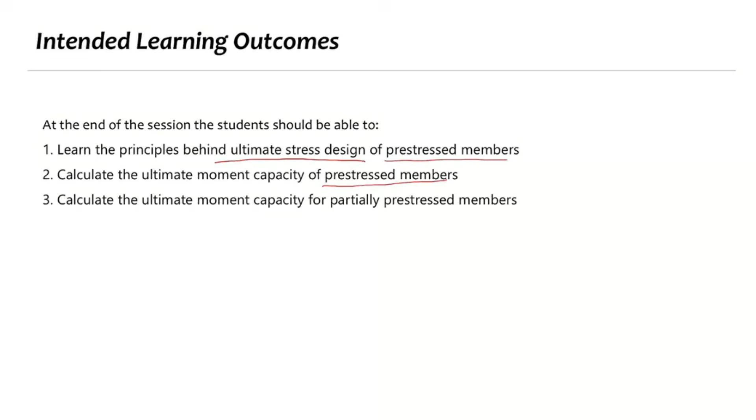For this one, what we are going to refer to is NSCP 2015. Again, we are going to refer to NSCP 2015 for calculation of pre-stress members for this discussion specifically.

There are different formulas when it comes to different codes, but of course we are going to refer to the local code. There's also a small difference when it comes to DPWH guidelines, but it's actually very small. So the concept is actually the same. It's the same.

Number three, we're also going to calculate the ultimate moment capacity for partially pre-stressed members. When we say partially pre-stressed members, it means it's actually a combination of rebars plus tendons. So we are going to combine rebars and tendons. That is called partially pre-stressed members.

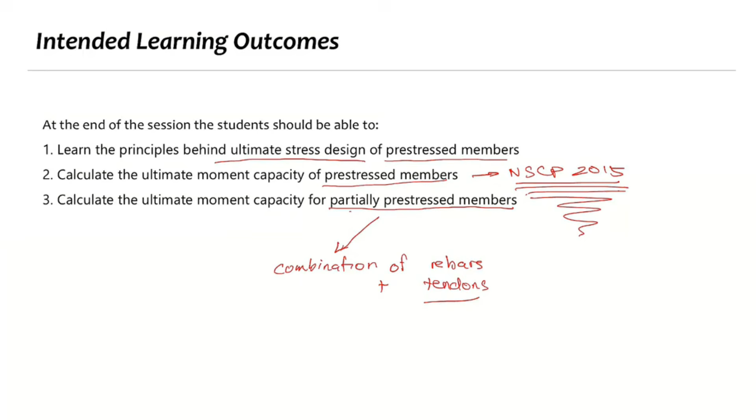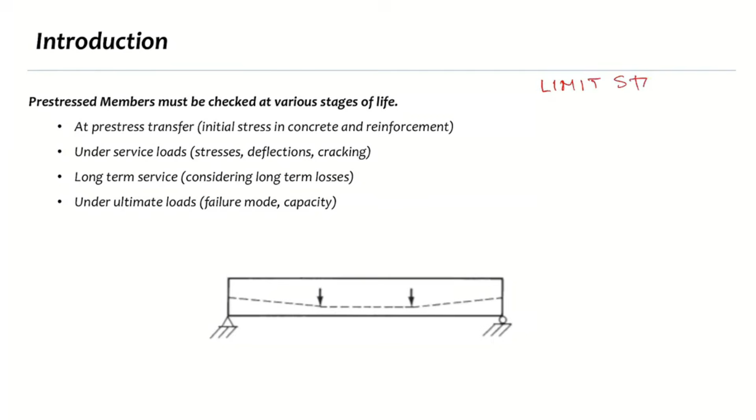Just a recall: what we are designing for are different limit states. The principle that we are using in designing is what we call limit state design. When we talk about limit state, I already discussed this in advanced concrete. When we say limit state, we are designing for all types of failure.

So in this case, we already know how to design with serviceability. Under serviceability, when we are designing for serviceability, that includes stress calculation and deflection. However, when it comes to deflection, I won't be able to cover it in this course because it's quite long, and basically how you calculate the deflection is already covered in theory of structures.

But when it comes to pre-stress, you calculate the deflection in order to calculate the cambering, because we are the ones who determine how big the curve of our pre-stress member should be. That's called the upward deflection, or camber. So how big does the camber need to be to counteract the deflection due to dead load? Again, the camber is actually the upward deflection due to pre-stressing, in order to counteract the deflection due to dead load. We calculate that too, and that is under the serviceability requirement.

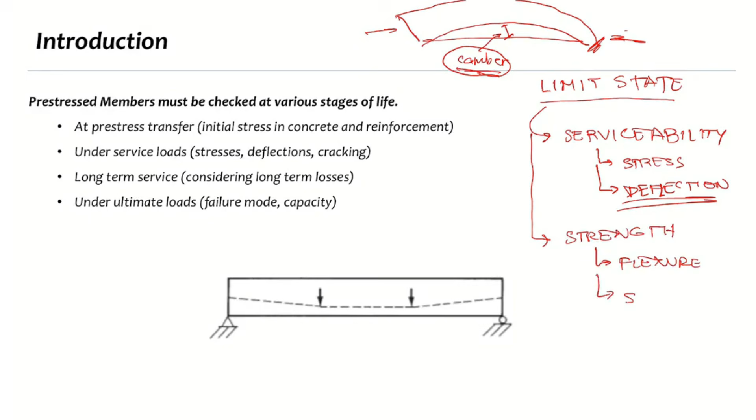Another limit state is the strength limit state. For the strength limit state, of course, that's where our flexure and shear come in. Of course, when we calculate for flexure, we are going to consider the ultimate strength design principle or collapse principle. Again, when we talk about flexure and shear, we are going to consider the collapse stage.

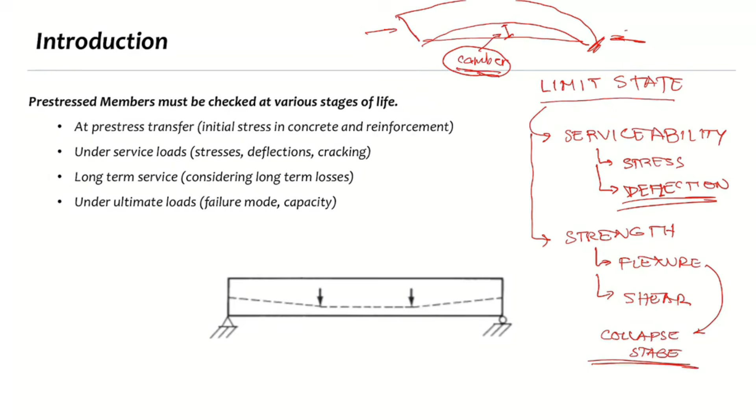So, when we are talking about flexure, we are going to consider the collapse stage, or basically the principle of ultimate strength design. For the collapse stage, that stress condition is considering an impending collapse — close to failure — in order to consider the full stress or full strength of the material.

And in order to ensure that our design is actually safe, we are introducing load factors. So in this case, when we are considering ultimate strength design, we should consider load factors. It's not 1.2, 1.6 for bridges — for bridges, it will be 1.25.

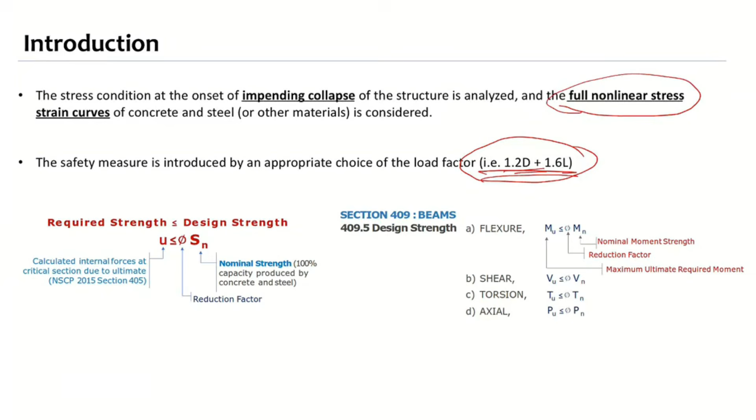For bridge, it will be 1.25 of DC plus 1.5 of DW plus 1.75 of live load. So 1.25, 1.5, 1.75 when it comes to bridge. But the principle is the same: the required strength, or the applied load, or what we call the demand, should be less than the capacity. The capacity is phi SN.

Or basically your capacity. When we calculate for the capacity, we also apply the reduction factor. The reduction factor accounts for any uncertainties in the calculation of the capacity. So when we say uncertainties, that is the strength of concrete, the strength of steel, the strength of tendons. So phi MN, the demand should always be less than the capacity.

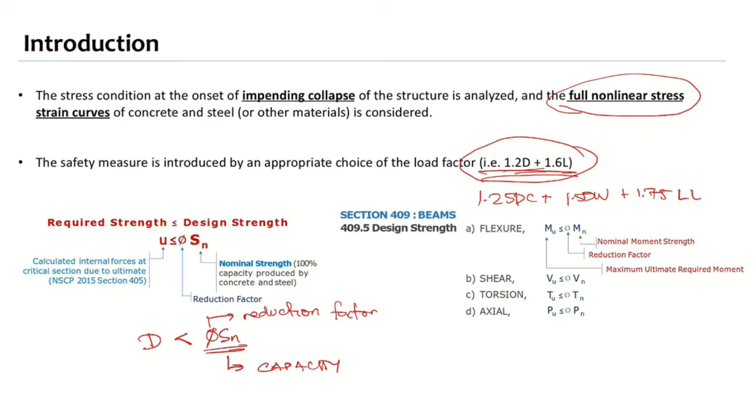Okay. So when we consider the ultimate strength design in prestressed beams, it's actually very similar to the principle of ultimate strength design in reinforced concrete beam. Parehas lang din 'yan, no?

So we will have a stress block. Meron tayong stress block A, with a maximum stress of 0.85 FC prime. This comes from the average of the strength, the average of the stress of the ultimate strength of the full nonlinear stress of the concrete. Kapag kinuha natin yung nonlinear stress ng concrete, naka-curve siya like this. So instead na consider natin yung curve, what we did is we consider an average stress block. So yung average stress block niya, yan po yung 0.85 FC prime.

So if we get the force caused by the stress, or the volume of the stress block, yan po yung compression which is equal to 0.85 FC prime AB. So basically to have the compression block, it's just 0.85 FC prime times the area of the stress block. Ang area ng stress block kapag rectangular is A times B.

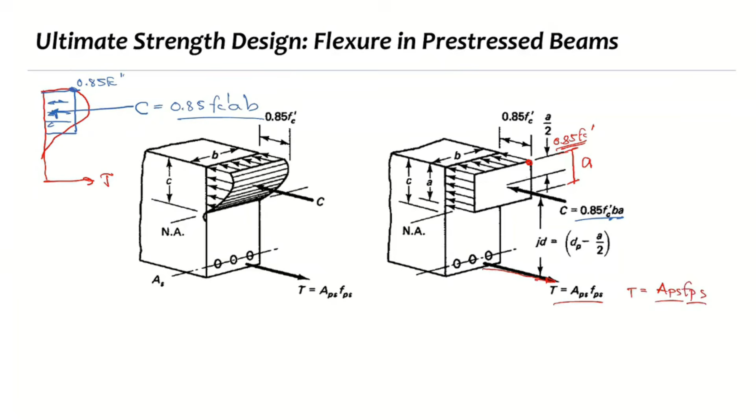On the other hand, yung ating prestress naman, yung ating tendons, the tension force caused by the tendons will be equal to APS, FPS. Hindi na siya ASFY, it's actually APS, FPS. APS is the area of the prestress strands, and FPS will be equal to the stress of the prestress strands. So yung FPS, meron yang provision.

Meron siyang provision sa mga codes kung on how to calculate the FPS. It differs from different codes, but the principle is still the same. Nagkakaiba lang ng formula yung nakapublish sa different codes pero parehas pa rin naman yung principle. So that's FPS to calculate the stress. Later on, I will show you on how to calculate it. This is the formula that we have in NSCP 2015, or basically, that is the stress in the prestress reinforcement.

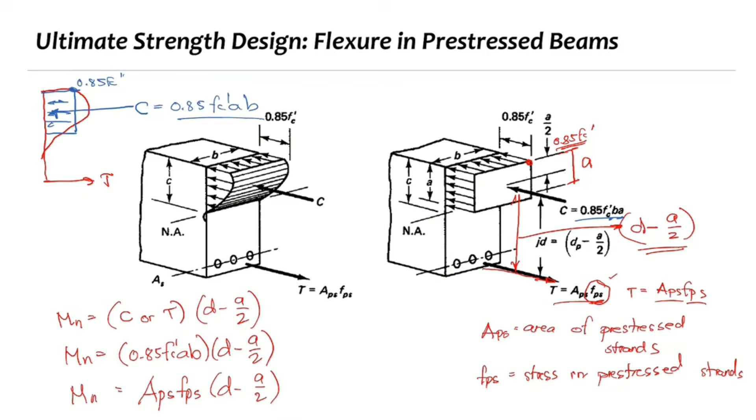You could question, sir, kailangan pa ba nating i-check kung mag-yield yung bakal? Hindi na po, because we are using FPS, hindi mo na kailangan i-check. Okay, you don't have to check, because meron tayong formula para dito sa FPS.

Okay, so when it comes to ultimate strength design, we also have to consider the depth of the neutral axis. The neutral axis is actually the division of the compression and tension zone. Ang depth po ng neutral axis natin, that is actually the depth C. And the relationship between the stress block A and the depth C is actually this equation.

A is equal to beta 1 C, where beta 1 is given in NSCP, which is if your FC prime is between 17 and 28 megapascal, beta 1 is 0.85. Or if your FC prime is between 28 and 55, then your beta 1 is equal to 0.85 minus 0.05 over 7, FC prime minus 28.

On the other hand, if your FC prime is greater than 55 megapascal, then your beta 1 is 0.65. So that's the relationship between the depth of the neutral axis and the depth of the stress block.

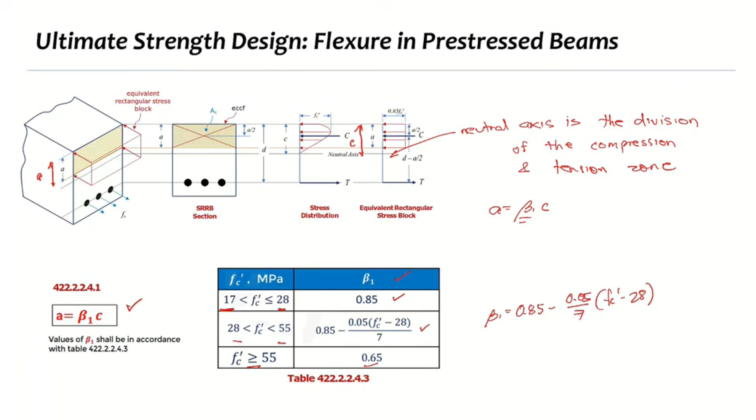Our stress block, that's the depth A. Stress block is the depth A. The depth of the neutral axis, that's depth C. So those are different, right?

So now how do we calculate FPS? According to our NSCP 2015 code, stress in bonded prestress reinforcement at nominal flexural strength. We have two types of prestressing methods: bonded and unbonded.

When we say bonded, this is where you put grout inside to hold the reinforcement. We call it bonded because it is bonded to the concrete. So in the area where the tendons are placed, you put grout inside. That's why it's called bonded tendons. So stress in bonded prestress reinforcement - we'll talk about bonded first.

For bonded reinforcement, to calculate for FPS, this formula is only applicable if your FPS is greater than 0.5 of FPU. So how do we calculate FPS, and how do we make sure it's greater than that limit?

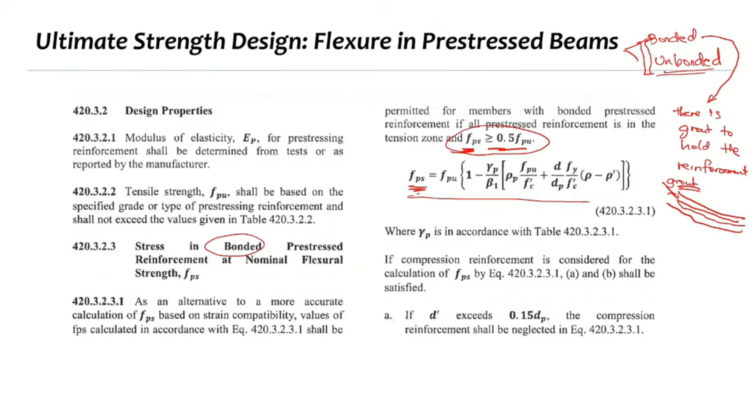To check the FPS, FPS is equal to P effective divided by APS - basically the post-tension force, or the pre-tension force, the prestress force, divided by the area of tendons.

So to get the FPS you'll use to check that FPS is greater than 0.5 of FPU - once you're sure you can use the formula, then FPS equals FPU times 1 minus gamma P. Let's go through each term.

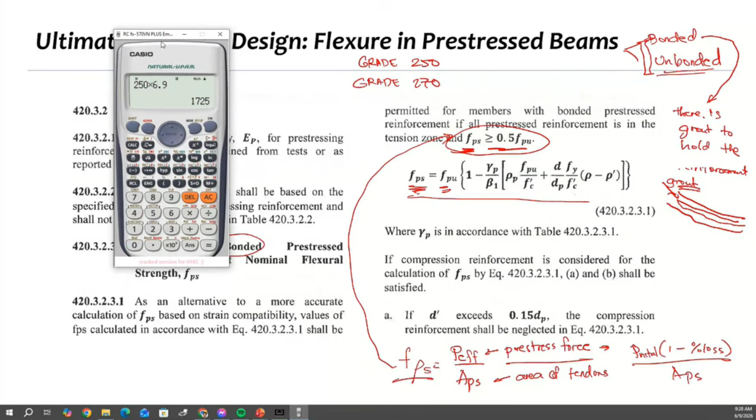250 times 6.9, that is 1725. Grade 250 is actually around 1750. Then grade 270, the FPU is equal to 1860 megapascal. Grade 250, how much did we calculate - around 1725.

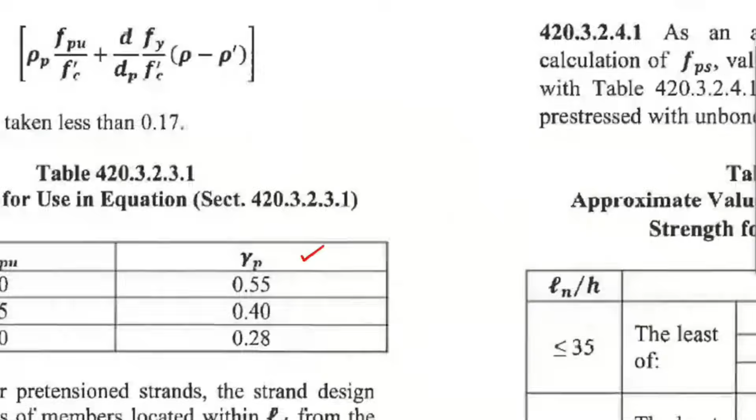So basically, FPU depends on the ultimate strength of the tendons. 1 minus gamma P - gamma P is in accordance with table 420.3.2.3.1. So gamma P depends on the ratio of FPY over FPU.

If the ratio of FPY over FPU is 0.8, this type of tendon we call deformed bars. If the ratio of FPY over FPU is 0.85, then the gamma P we use is 0.4 - that's what we call stress-relieved.

If the ratio of FPY over FPU is 0.9... that is low relaxation. So you have deformed bars, stress-relieved tendons, and low relaxation tendons. It depends on which one you use in your design.

This ratio also helps us determine the yield strength of tendons, since they have different yield strengths.

For example, for a stress-relieved grade 270 tendon, to get FPY, we know FPU is equal to 1860 megapascal. To get FPY, use the ratio of FPY over FPU, which is 0.85 for stress-relieved. So FPY is equal to 0.85 times FPU, which is 1860. How much is the FPY of grade 270?

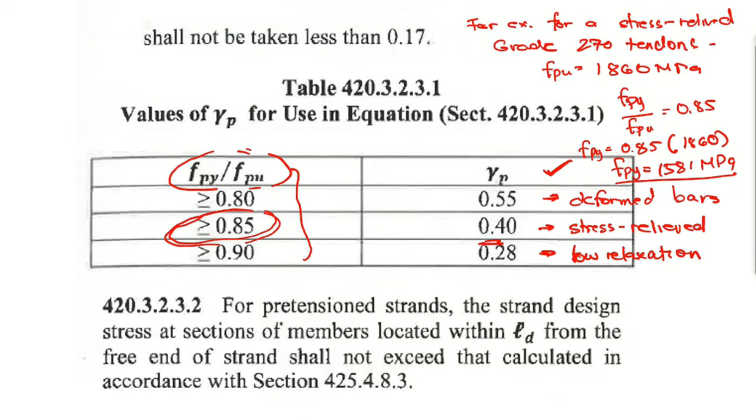For deformed bars, you use 0.8 instead. For low relaxation, you use 0.9. That's how you calculate the yield strength of tendons.

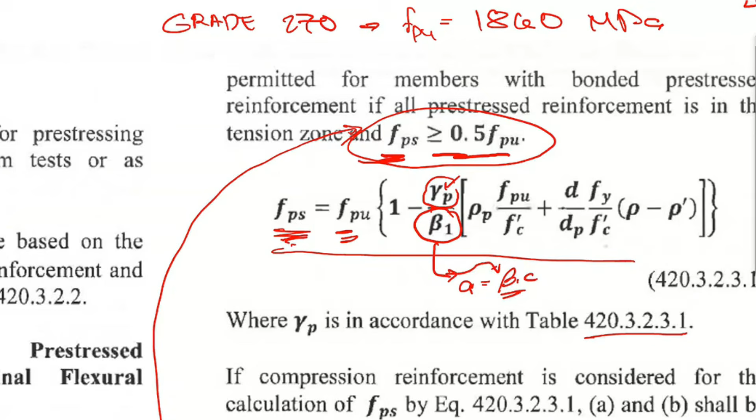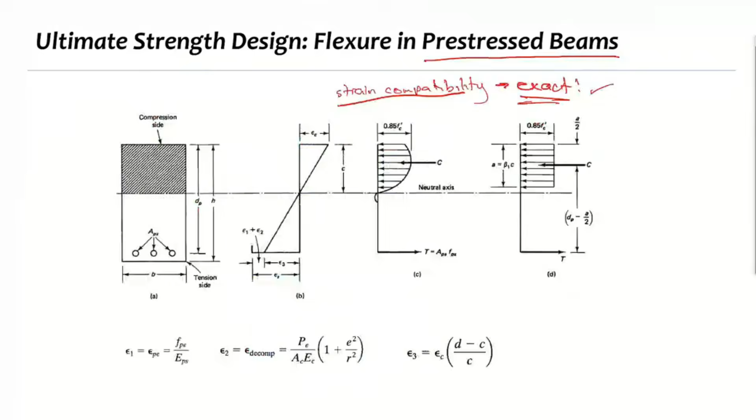Okay, so alam na natin paano kuhanin yung gamma P. On the other hand, paano naman kunin yung beta 1? Beta 1 depends on the strength of concrete. Ito po yung beta 1 na ginagamit natin sa A is equal to beta 1C. So yung beta 1 dito, parehas lang din dyan, yan lang din yung beta 1 na gagamitin natin. Beta 1 is actually this value, 0.85, 0.7, 0.65.

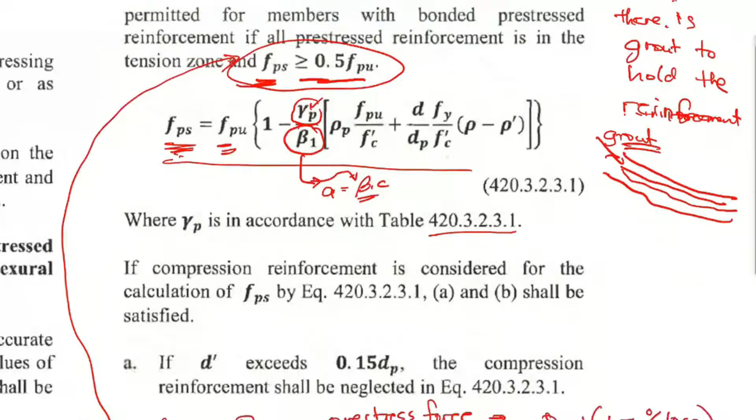Okay? And then rho P, ano naman tong rho P? Rho P is the pre-stress ratio. So paano makuha yung pre-stress ratio, yung rho P? Rho P is just equal to APS over BD, APS over the area of concrete, B times the effective depth D. APS over BD, that's rho P, pre-stress ratio. Parang reinforcement ratio lang.

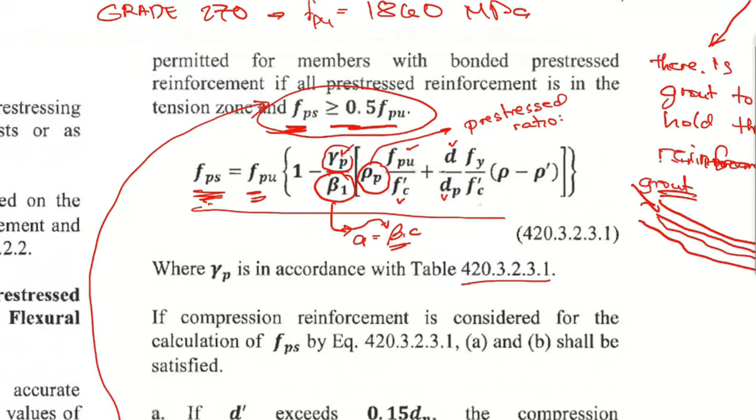FPU, that is the ultimate strength, okay na tayo dyan. FC prime, okay din naman tayo dyan. Plus D over DP, magkaiba po yung D saka DP. This is applicable, this part right here, kapag meron na tayong additional reinforcement, meron tayong additional reinforcement na rebar. So yung D natin, that's the effective depth of rebar. Yung DPS naman, that's the effective depth of tendons. So D over DPS, that's the effective depth of rebar over the effective depth of tendons.

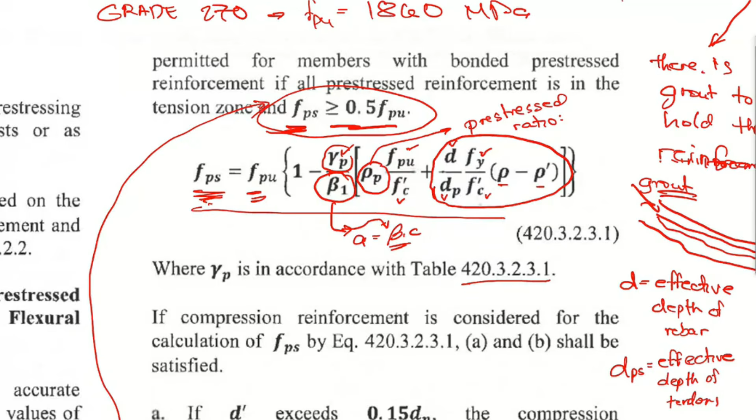Fy is the strength of rebar. FC prime is the strength of concrete. Rho minus rho prime, yung rho natin is the steel ratio at tension. Again, yung rho is AS over BD, ibig sabihin tension reinforcement po ito. Kapag naman po rho prime, that is AS prime over BD. Yung AS prime, that is the compression reinforcement. Or basically, yan yung area ng bakal sa taas under compression.

Also, let's read through. If compression reinforcement is considered for the calculation of FPS, equation A and B shall be satisfied. Dapat daw makonsider natin yung equation A and B. Equation A, if D prime exceeds 0.15 of dP, the compression reinforcement shall be neglected. Ibig sabihin, pag yung position ng D prime exceeds 0.15 of dP, or dP is the effective depth for tendons, hindi na siya dapat i-consider.

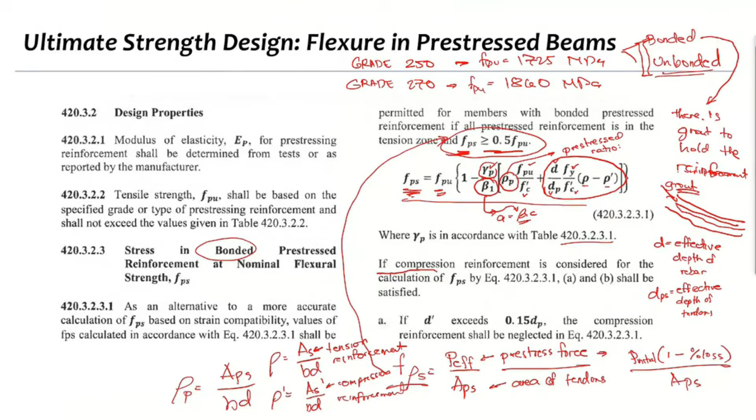Next, if compression reinforcement is included, this term right here shall not be taken as less than 0.17 if may compression reinforcement. Again, we should consider this if compression reinforcement is considered, itong A and B. Consider natin yan kapag may compression reinforcement.

Another one, for unbonded pre-stress reinforcement at nominal flexural strength. This one naman, unbonded naman tayo. But before we go to unbonded, punta muna tayo dun sa, mag-example muna tayo ng bonded tendons. Bonded muna tayo.

Also, to calculate for the phi factor, it will be the same as how we calculate the phi factor for reinforced concrete. We have compression controlled, tension controlled, and transition. For the transition, in this case, our strain, hindi na po siya EY kasi EY is the yield strain of steel. Ang gagamitin natin dito, 0.002 kapag transition. Transition, that is between 0.002 and 0.005. Kapag 0.65, 0.002. Kapag 0.9, 0.005. That is the transition zone.

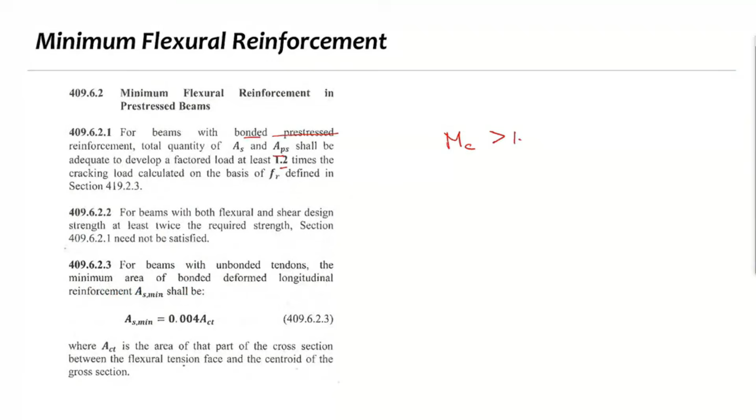Aside from that, we also have to calculate for the minimum flexural reinforcement for beams with bonded pre-stress reinforcement. So dun muna tayo sa bonded. For bonded pre-stress reinforcement, dapat daw yung quantity ng AS mo and APS shall be developed at a factored load at least 1.2 times the cracking load. So dapat yung MC natin, yung capacity natin ng moment should be greater than 1.2 MCR. Yan po yung minimum capacity niya, that's the minimum capacity of a bonded pre-stress beam. So dapat yung phi MN should be greater than 1.2 ng cracking load, MCR. So alam natin mag-calculate ng MCR, that is using the requirements of serviceability, yung P over A, MC over I.

Sige, let's have this example. For this one, this is for bonded tendons. So bonded muna tayo. So bonded tendons, we have an FC prime 34.5 megapascal. Usually yung mga pre-stress beams po natin, matataas yung FC prime niyan, hindi lang 28 na. So we have FC prime 34.5, FPU 1860. So ibig sabihin this is grade 270. EPS is 197,000 megapascal, that is the modulus of elasticity of pre-stress. Hindi siya 200,000, it's 197,000.

We have to consider 15% losses and bonded tendons. The initial pre-stressing is 780 kilonewton. Span length is 10 meter.

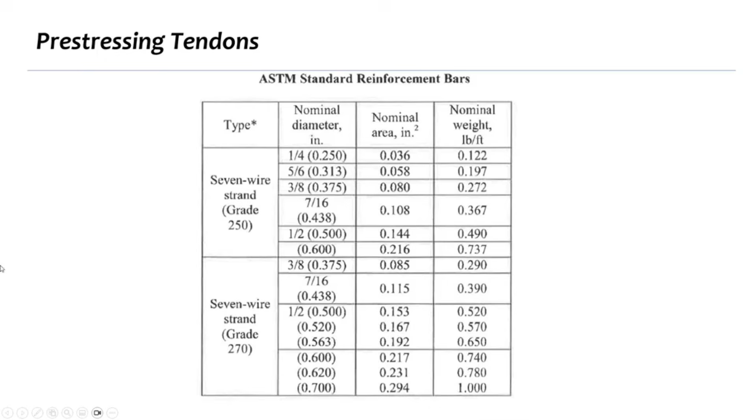So to calculate for the percent loss, or the APS pala muna, gagamit tayo ng 6 1/2 strands. Balik tayo dun sa first lecture natin, babalikan natin yung area ng reinforcement. Yung grade 250 sa grade 270, dalawa lang naman yan. Dahil grade 270 tayo yung ginagamit natin, 1/2, our area is 0.153.

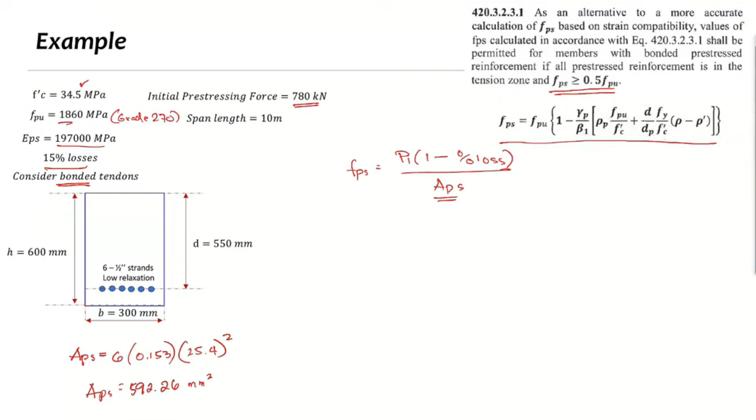Kunin muna natin yung APS. APS will be 6 times 0.153 times 25.4 para maging millimeter, and then times squared. So ilan po yung APS natin? That is 592.26. Solving for FPS, that is P initial, that is 780 times 10 raised to 3 to make it Newton, times 1 minus percent loss, ang loss natin 15, so 0.15, divided by APS, which is 592.26.

Ilan to? 1119.4408 megapascal. So this is greater than 0.5 of FPU, kasi ang 0.5 of FPU natin, 0.5 of 1860, ilan to? 930 megapascal. So dahil yung FPS natin greater than 930, so we can use this formula.

Question, sir, paano kapag less than? Anong gagamitin? We have to use strain compatibility, yun yung mas mahabang calculation. Strain compatibility equation yung kailangan gamitin kapag hindi siya greater than.

Okay, so yung FPS natin, dahil okay po ito, magagamit na natin yan. So gamitin natin yung formula. Wala tayong compression reinforcement, so wala tayong rho prime, so this will be cancel. Hindi natin mo-consider to because wala tayong additional rebar, puro tendons lang.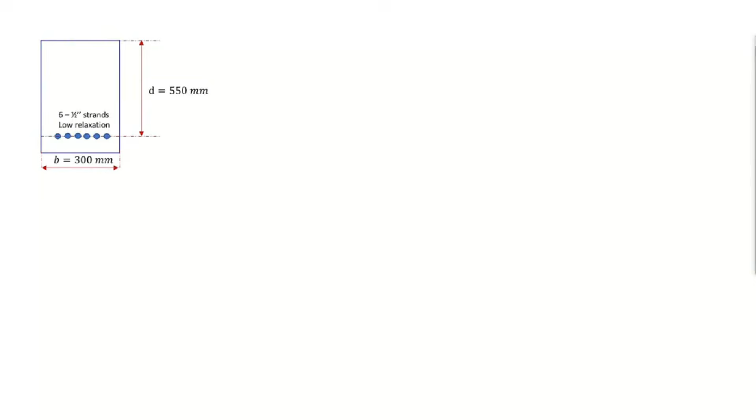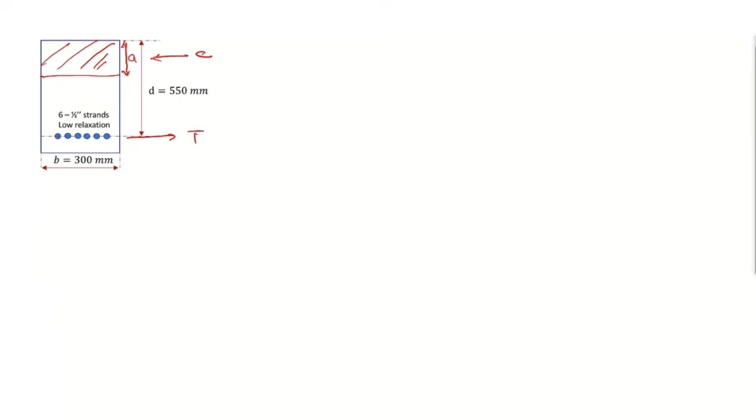So once you determine FPS, the rest will be actually very similar with reinforced concrete design. So we will have the compression block at the depth A. Tapos meron kang compression, tapos meron ka pong tension dito. Yung tension mo, that is APS, FPS. Compression is 0.85 FC prime, AB.

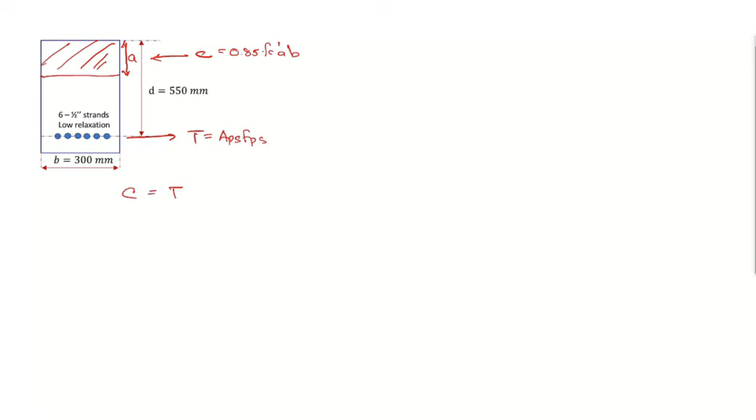Para makuha natin yung A, equate natin yung compression is equal to tension. Compression natin, 0.85 FC prime, AB, is equal to APS, FPS. 0.85 of FC prime, that is 34.5. We are solving for A. Ang B natin, 300, APS is 592.26, FPS is what we solved.

FPS is 1734.5869. You can solve for A. What is A? 116.77 millimeter. Once you solve for A, we can now solve for C. Yung C natin will be A over beta 1, which is equal to 116.77 divided by beta 1, which is 0.8036. Ilan yung C?

145.3146 - so this is the depth of the neutral axis. This is the depth of the neutral axis.

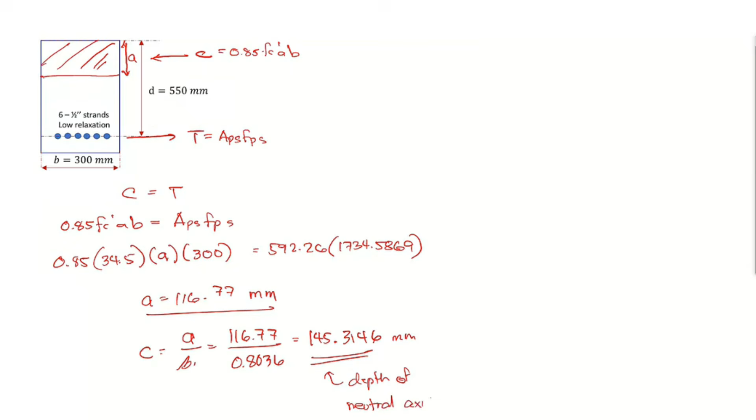Now to calculate for the capacity Mn, we can use compression or tension, D minus A over 2. I'll use tension: APS, FPS, D minus A over 2. So Mn equals APS, that is 592.26 times 1734.5869 times D minus A over 2.

So that's 550 minus A over 2, which is 116.77 over 2. What's Mn? 505.05 kilonewton meter. So that's the nominal strength.

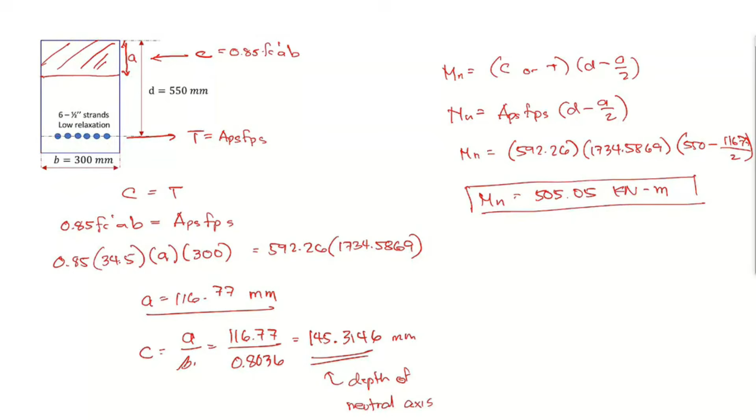And then to check for the ultimate strength, we have to calculate for the phi factor. To calculate for the phi factor, we need the strain - so we have C. So in the strain diagram, if this is 0.003, we need to calculate the strain of the prestress, EP.

To calculate for the strain of the prestress, we just do ratio and proportion. That is D minus C. So 0.003 over C is equal to EP over D minus C. Solving for EP, that is 0.003 times D minus C over C. So to solve for the prestress strain, EPS, that is equal to 0.003.

Our effective depth is 550 minus C, over 145.3146. What is EPS? 0.00835.

This is greater than 0.005, so that means this is tension controlled. So if tension controlled, what's the phi factor? 0.9. So to calculate for Mu, Mu will be equal to phi times Mn. So Mu equals 0.9 times the nominal moment capacity, 505.05.

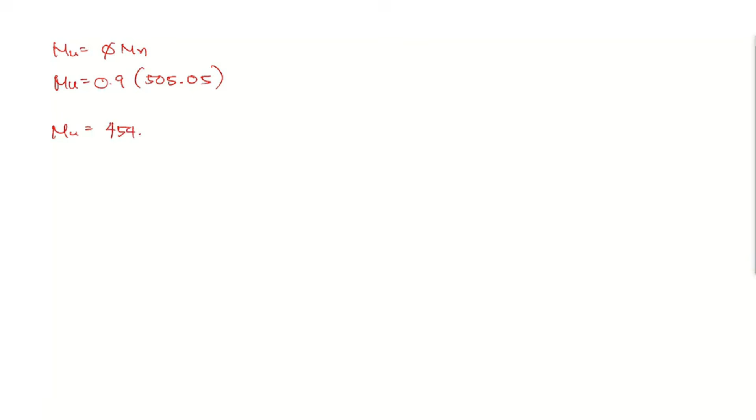What is Mu? 454.545 kilonewton meter. 454.5.

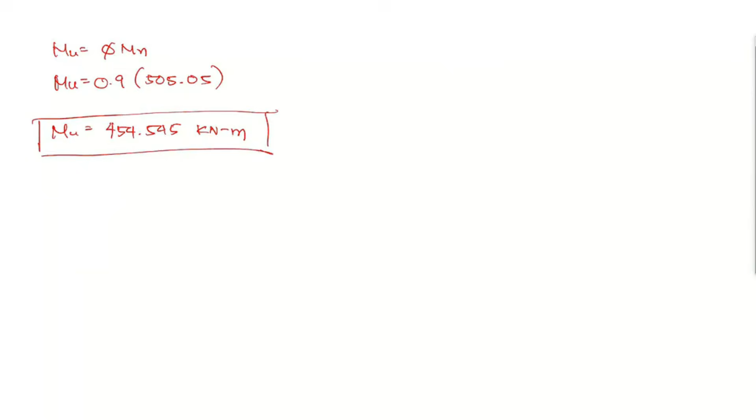Next, once we're okay with the capacity, we check for the minimum requirements. Our minimum requirement is that phi Mn should be greater than 1.2 of MCR. So we have capacity, our capacity is 454. We need to calculate 1.2 of MCR.

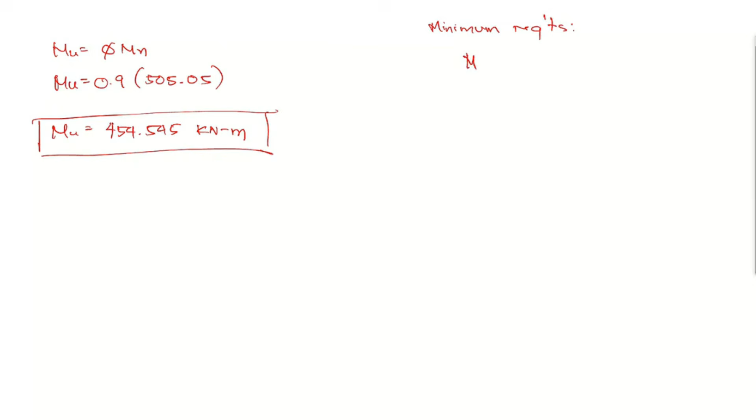So again, minimum requirements according to the code, Mu should be greater than 1.2 of MCR. So let's get MCR. To calculate for MCR, our MCR is equal to the cracking moment.

So to get the cracking moment, to calculate MCR, what we do is take the stress at the bottom, stress at the bottom, and equate it to the limit. Our limit is 0.62 square root of FC prime.

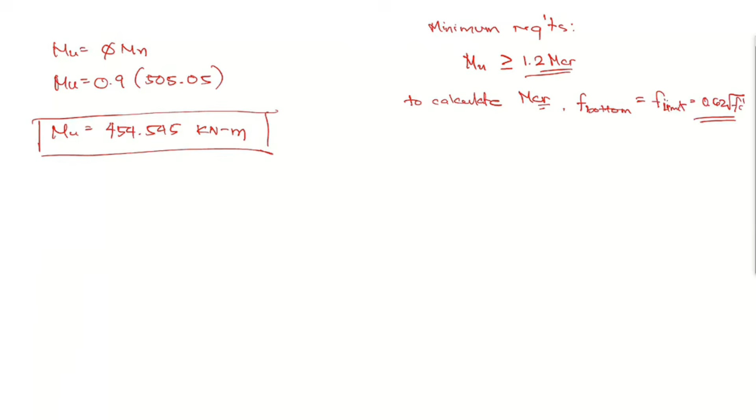So I have a uniform load here. Let's take this - this is 10 meters. I have here P effective.

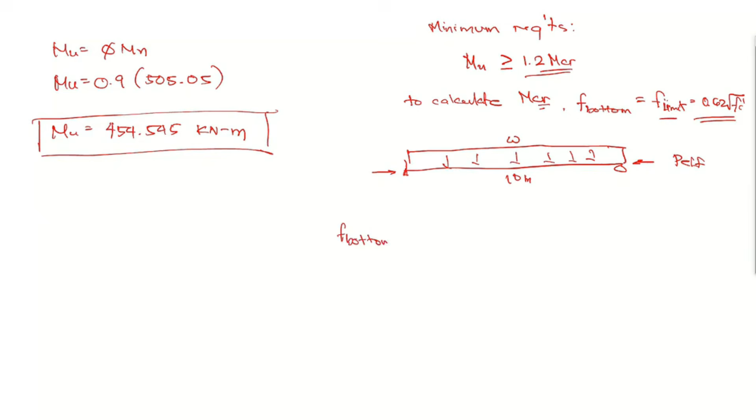So to get F bottom, it will be equal to negative P over A. Again, what we're getting is F bottom at the middle. Negative P over A, negative because it's compression. Then at the middle, is it plus or minus for bottom? Positive or negative? That will be compression too, so negative. Negative PE times YT, or PEC over IG.

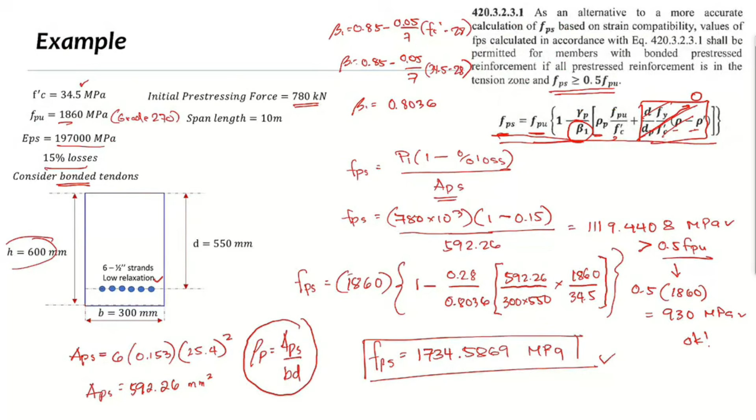Our eccentricity is - what is the eccentricity? If the centroid is at the middle since it's just a rectangle, what is our eccentricity? Eccentricity will be 550 minus 300, which will be 250.

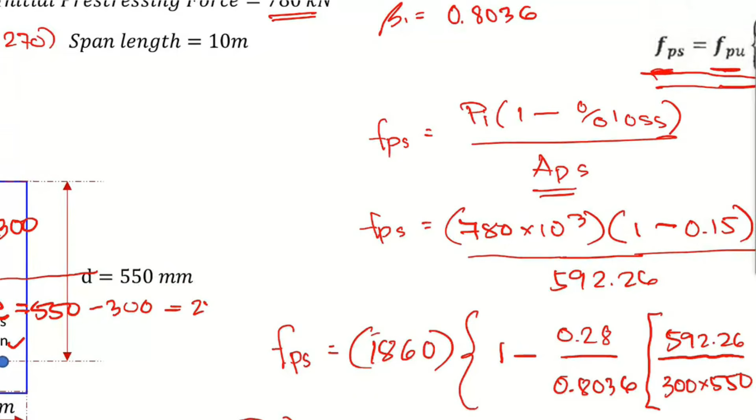Did you get it? Isn't half of 600 equal to 300? So that's 550 minus 300. The eccentricity is 250. Did you get how the eccentricity is measured from the center? So again, our eccentricity is equal to D over 2 or H over 2, H over 2 minus, or rather, D minus H over 2.

D minus H over 2. So basically, that's 550 minus 600 over 2. So ang eccentricity natin, 250.

So multiply by eccentricity, 250, times C, 300. C natin, 300 over IG. Ang base is 300 times 600 cube over 12 plus MCR times 10 raised to 6 to make it kilonewton meter.

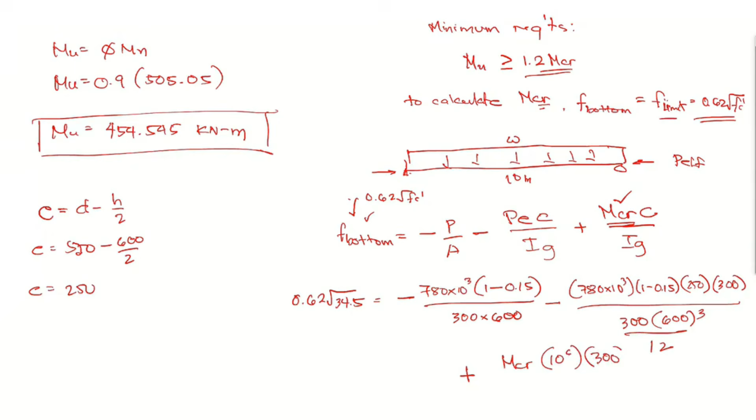And then C, ang C natin coming from the center. Nakuha ba kung ano yung C? Ang C natin, kung ito po yung centroid, nasa 300 mm. So ang C is coming from the centroid going to the tension zone. So that is 300 mm. Okay? Yan din yung C na ginagamit natin sa serviceability.

So MC over I is 300 times 600 cube over 12. So what's MCR? Solve for MCR. 297.

MCR is 297.6. So i-check na natin yung minimum requirements if okay tayo. So yung MU natin, MU is 454.545 greater than 1.2 ng 297.6.

Ilan yung 1.2 ng 297? 357.12. So 454.545 is greater than 357. So this is okay. Ibig sabihin, okay po yung design. It's acceptable given na na-reach niya yung minimum requirements.

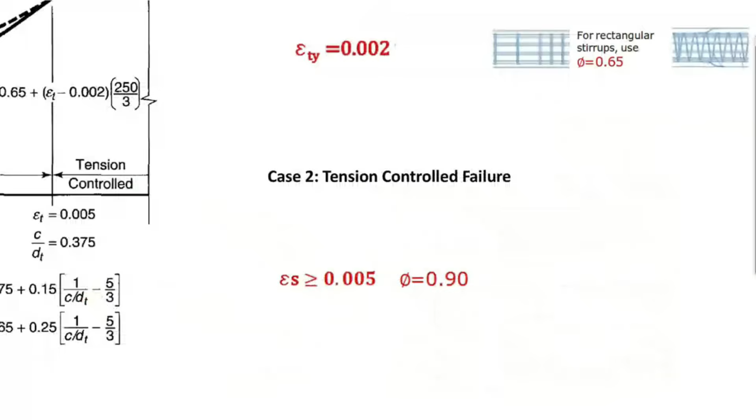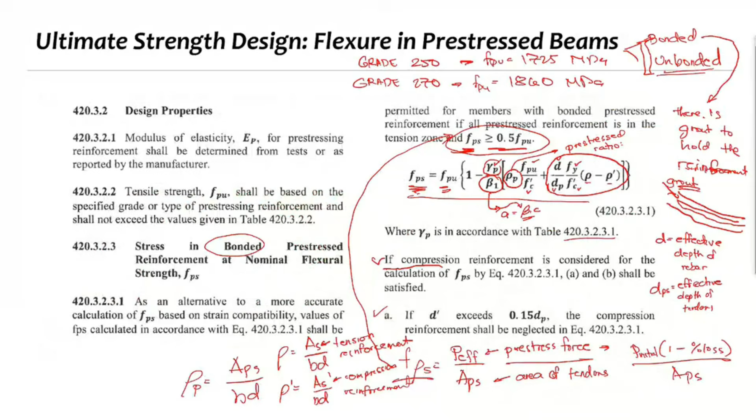Okay? So yan din yung FPS kanina, yung ginamit natin sa bonded. So we have to make sure na yung FSE is greater than 0.5 ng FPU pa din. If that's okay, we can use this following formula. So dalawa lang po ito.

We have to check ln over h. Ano yung ln? Ln is actually the clear span, over the height. Yung clear span ng beam over the height of the beam. So ln over h, kapag less than 35, then you should use this formula. Kapag greater than 35, gagamit tayo dito sa tatlong formula.

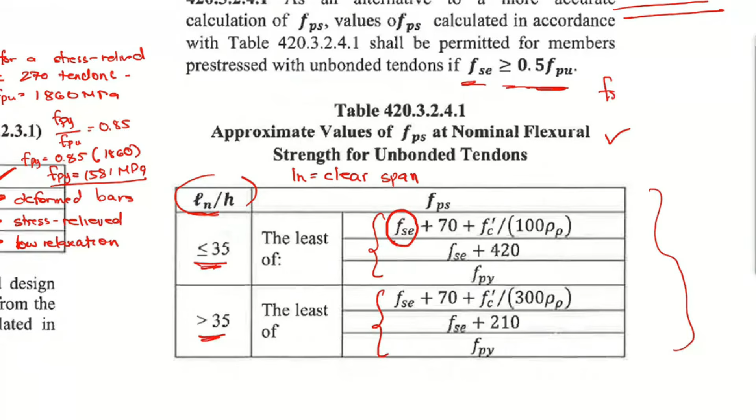Again, ano na nga yung FSE? FSE is just equal to Peff over APS, or ito yan, yung P initial, 1 minus percent loss over APS.

So FSE times plus 70 plus FC prime over 100 rho P. Alam naman natin yung rho P, yung rho P is just equal to the pre-stress reinforcement ratio. FSE plus 420, or FPY.

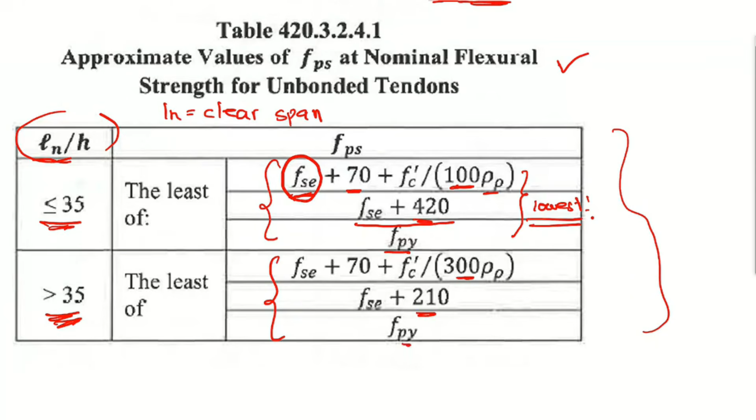You have to calculate or get whichever is the lowest between the three. Ano po yung pinakamababa? You calculate the lowest between the three. Okay? Kapag greater than 35, ang nagbago lang yung 100 naging 300, yung 420 naging 210, and FPY. Okay? So and the rest will be the same. Ang nagbago lang yung pag-calculate ng FPS, the rest is actually the same.

Sige, let's try to apply this. Another change kapag ka unbonded tendons, yung cracking niya, yung minimum flexural reinforcement is equal to 0.004 ACT. So kung ito po yung ating reinforcement, ACT is the area of the cross section under the tension face. So ito yung area ng cross section under tension, ibig sabihin, under tension po ito.

So basically, this will be depth over 2 times B. So yung area minimum daw niya is minimum 0.004 ng B times D over 2. Yan lang po yung minimum requirement niya. Hindi katulad sa bonded na kailangan mo i-calculate yung cracking moment.

Okay, so let's try to apply this one. For this one, consider naman tayo unbonded tendons. So again, before po tayo mag-calculate ng unbonded tendons, we have to check natin dapat yung FSE.

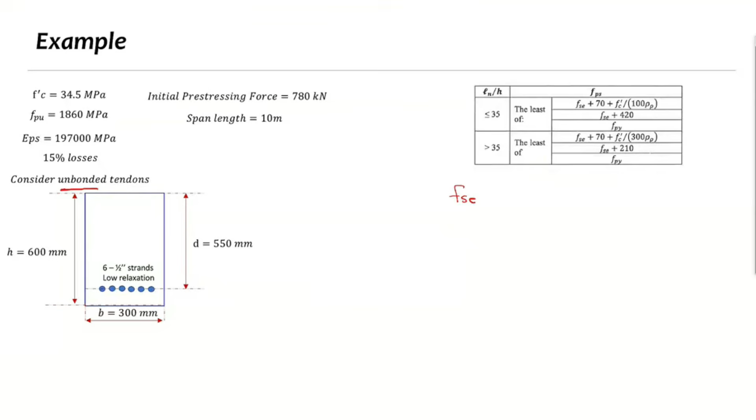This time, yung FSE tayo. FSE should be greater than or equal to 0.5 of FPU. Kailangan na-satisfy ito para magamit natin yung equations. Okay? Actually, na-calculate na natin yan kanina. Sige, ulitin lang din natin.

To calculate for APS is equal to 6 na 0.153 times 25.4 squared. Ilan to? APS is? Ilan na nga to? APS kanina, 592.26 millimeter squared. So check natin if okay po ito.

FSE, that is, again, yung FSE is just equal to initial pre-stressing, P initial, 1 minus percent loss, over APS. So yan lang din yung FSE. So 780 times 10 raised to 3, 1 minus percent loss, 0.15, over APS, 592.26. FSE is equal to, ilan yung FSE natin? 1119.4408.

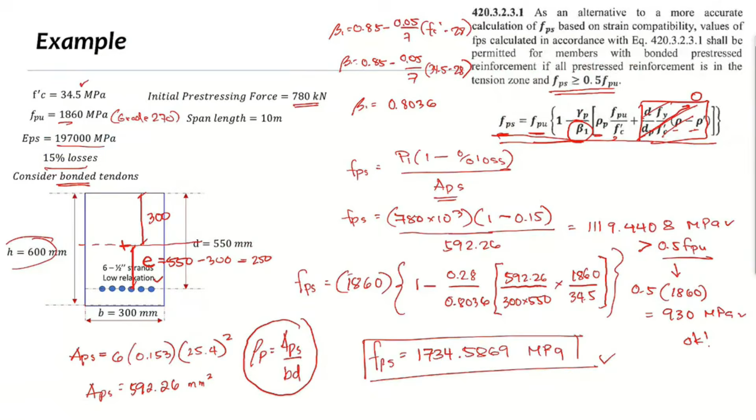1119.4408 megapascal, so yan yung FSE. It should be greater than 0.5 of FPU, 1860. So this is greater than 930. So okay, magagamit natin yung formulas.

Para magamit yung formula, hanapin muna natin yung ln over h. Ano yung ln over h? ln over h is the span length, which is 10,000, divided by the height. Ang height natin is 600. Ilan to, 10,000 over 600?

16.67. This is less than 35. So ito po yung mag-govern, ito yung gagamitin natin, less than 35.

So we can now solve for FPS. FPS is equal to the minimum between the three conditions. Una, FSE plus 70. Meron na tayong FSE, 1119.4408. Yan yung FSE plus 70.

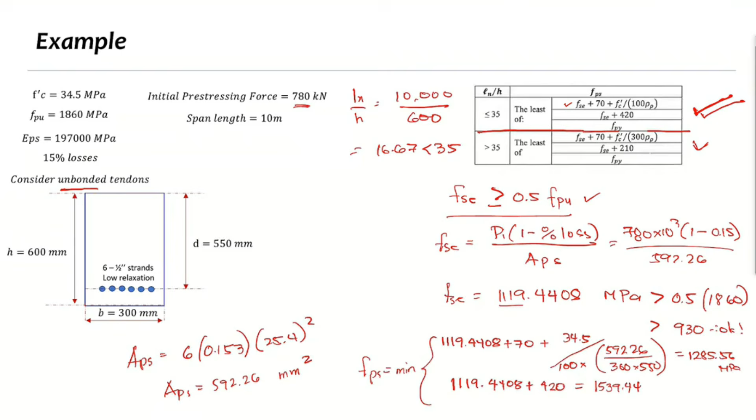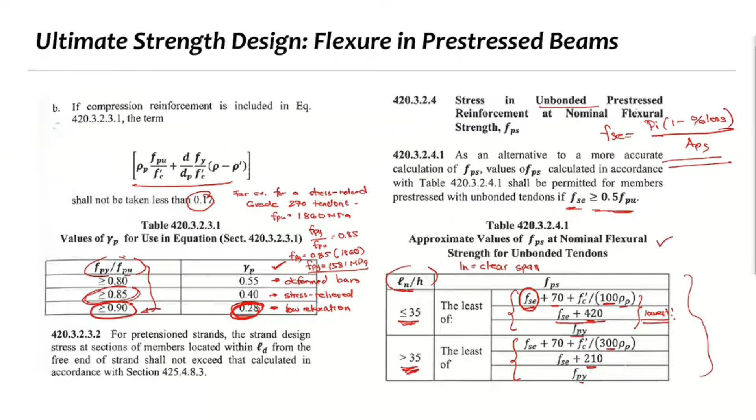So para malaman natin yung FPY, balikan natin. This is low relaxation, no? So kapag low relaxation, balik tayo dun sa code. Kapag low relaxation, ang gamma P niya 0.28, pero ang ratio ng FPY sa FPU ay 0.9. Again, kapag low relaxation, FPY over FPU is 0.9. So FPY over FPU is equal to 0.9 para sa low relaxation.

So yung para makuha natin yung FPY, will be 0.9 ng 1860. Ilan yung FPY? 1674. So sino mag-govern? 1285, 1539, saka 1674. Mag-govern si 1285, kasi whichever is smaller. So yun yung mag-govern na FPS natin, yung 1285.56.

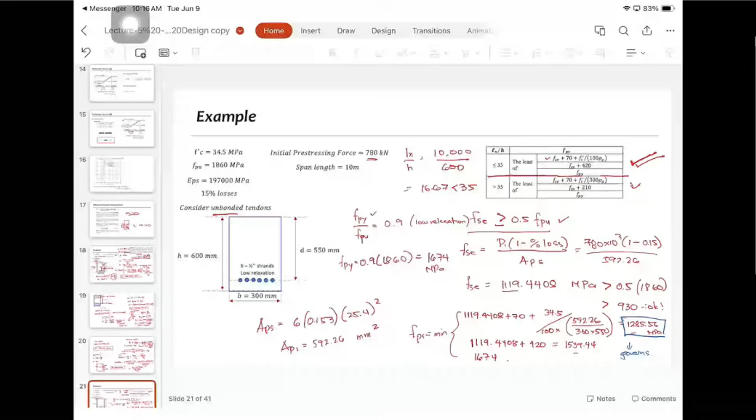And then after that, we calculate for the A, we calculate for C, all will be the same. Parehas lang dun sa kanina.

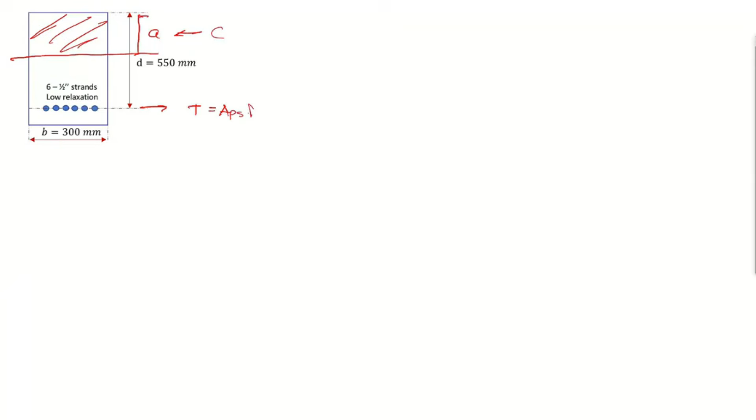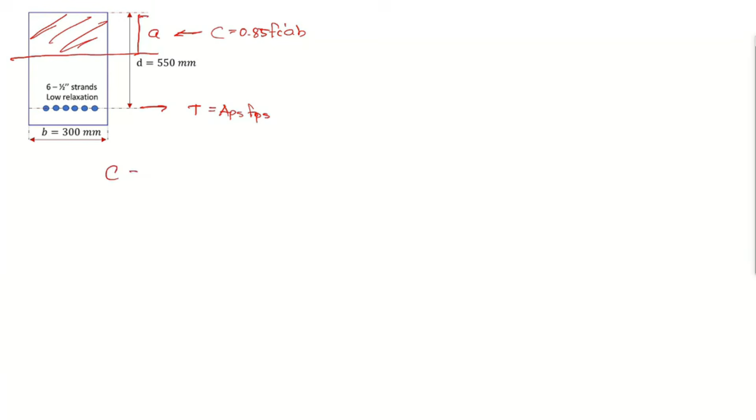Okay, solve na natin yung depth A. So meron tayo ulit compression, tapos meron tayong tension. Tension is APS, FPS. This is 0.85 FC prime, AB. Para ma-solve yung A, compression is equal to tension. Compression is 0.85 FC prime, AB is equal to APS FPS. 0.85 FC prime natin is 34.5.

A is unknown, B is 300. APS will be 592.26. And then FPS, what we solved, 1285.56. What is A? 86.55.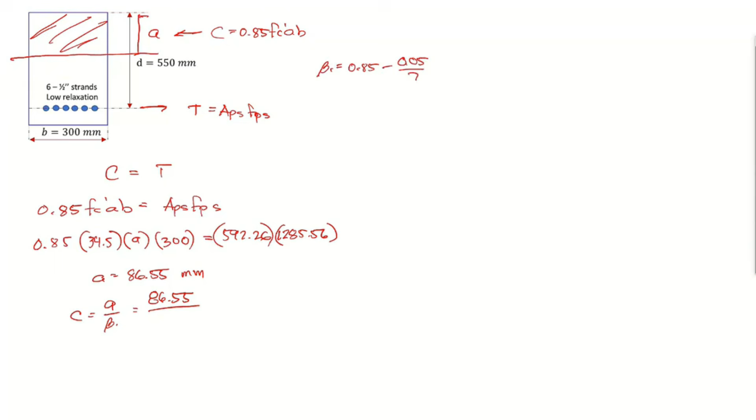We can now solve for C. C is equal to A over beta 1. A is 86.55 over beta 1. Ang beta 1 natin, na-solve natin to kanina, that is 0.85 minus 0.05 over 7, FC prime, 34.5 minus 28. Beta 1 is 0.8036, tama ba? Yeah, 0.8036. So this is equal to 107.70.

So once we calculate for A, we can now calculate for Mn. Mn is equal to compression or tension, times D minus A over 2. Tension na lang gamitin ko, APS, FPS, times D minus A over 2. APS is 592.26 times FPS, 1285.56, times D minus A over 2. So that is 550 minus A over 2, 86.55 over 2. What is Mn?

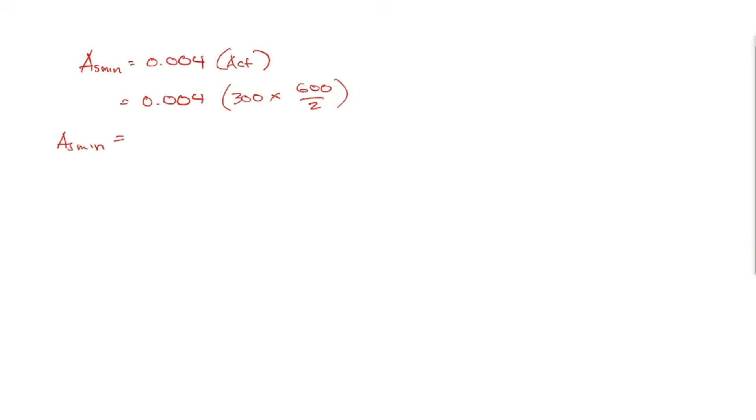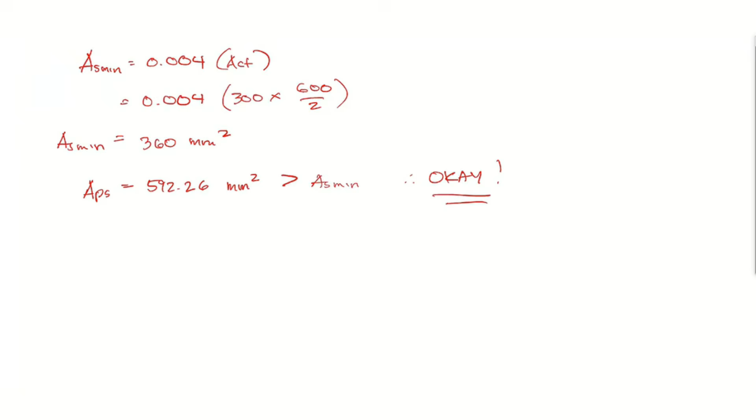360 mm squared. So yung APS natin, this APS is equal to 592.26. So APS is greater than AS min. So ibig sabihin, this is okay. Okay, so okay po yung reinforcement natin.

What you can notice, ano pong na-notice nyo? Bakit, kaya nga, kung based on the calculation, sinong mas mataas? Yung bonded or unbonded? Bonded, that is correct. That is a very simple principle na kapag inisip mo, kapag nilagyan mo pala ng grout, kasi nakahawak po, kasi hinahawakan ng grout yung tendons, mas malakas yung capacity mo. Mas malakas yung capacity mo. So mas malakas yung bonded.

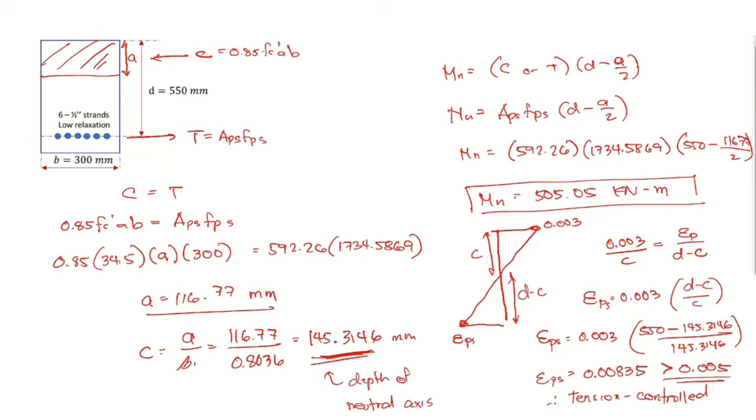So usually, yan talaga yung ginagamit natin, yung bonded tendons, no? So for bonded tendons, it's also have a greater capacity than unbonded. Mas okay po yung bonded.

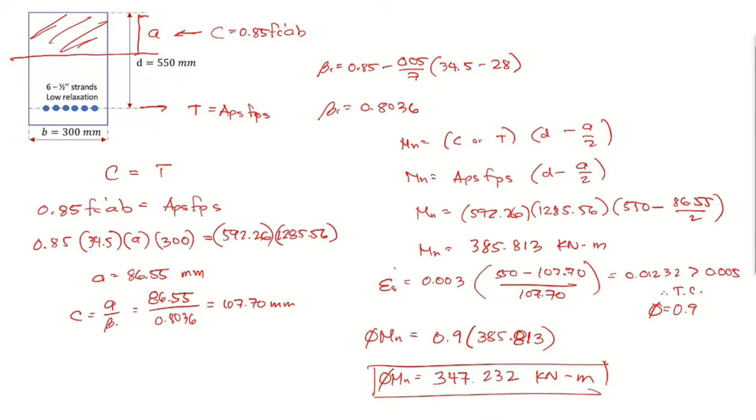Kasi kapag unbonded, 347 lang. Kapag bonded, we have 454.

Any question about this? Ito po, bonded tendon siya, so gamitan nyo na to. Tapos, ano pa ba?

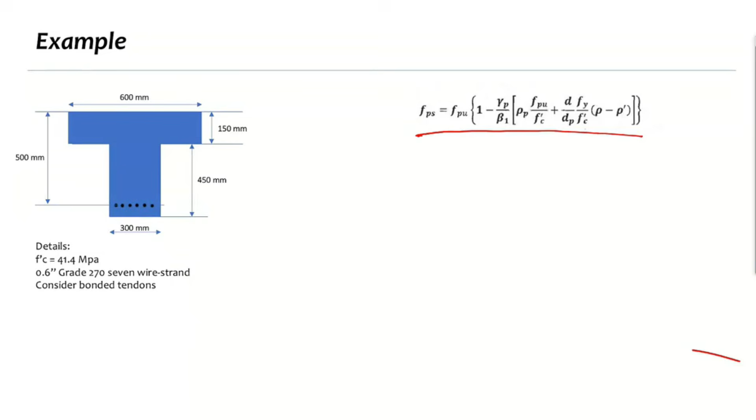0.6 inches, so ang area ng APS natin dito will be equal to 1, 2, 3, 4, 5, 6, 6 na. Ang 0.6 inches, ang area po niya is 0.217. 0.217 times 25.4 squared, yan po yung APS mo.

You don't have to check kung applicable po yung formula. Gamitin nyo na to agad. No need for checking kung applicable yung formula. Gamitin mo na to agad. Hindi nyo na kailangang i-check, gamitin mo lang to agad. So, ilan tong APS natin? Ilan to?

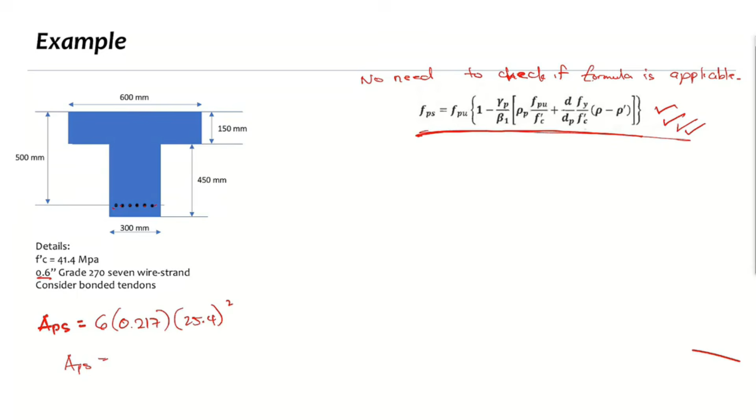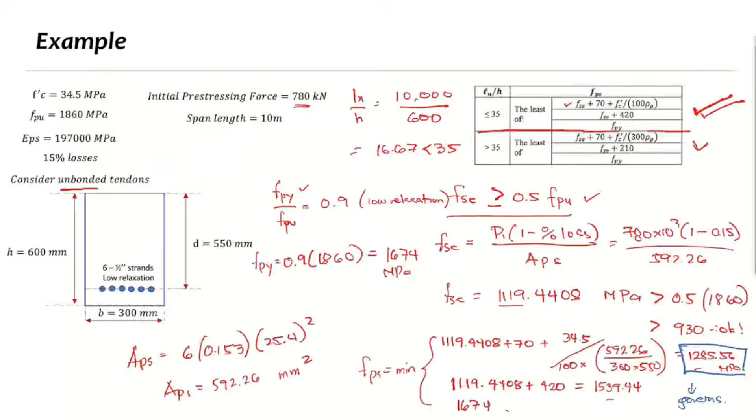Ang gagamitin mo po dito, low relaxation. So kung low relaxation, this is 839.998. Low relaxation, ano pong gamma natin? Low relaxation, that is 0.28.

Again, when you are dealing with T-beams, kapag iba po yung shape, you have to check nasaan ba yung reinforcement. Ano ba yung width dun sa side ng reinforcement. Tapos yung width dun sa side ng reinforcement, yun yung gagamitin mo sa rho P. Okay? So, again, kung ano yung width dun sa side ng reinforcement, yun yung gagamitin mo sa rho P.

Okay, sige, solve natin. Pakita natin, una, solve natin yung beta. Beta 1 is equal to 0.85 minus 0.05 over 7, FC prime, that is 41.4 minus 28. Ilan yung beta 1? 0.7543.

And then to solve for... wala na, okay na, yan na yung lahat, no? Solve for FPS na lang. FPS will be equal to FPU 1860 multiply by 1 minus gamma P, that is 0.28 over beta 1, 0.7543.

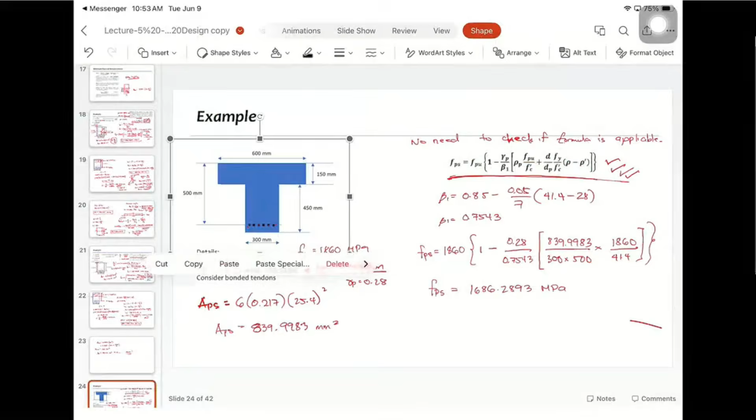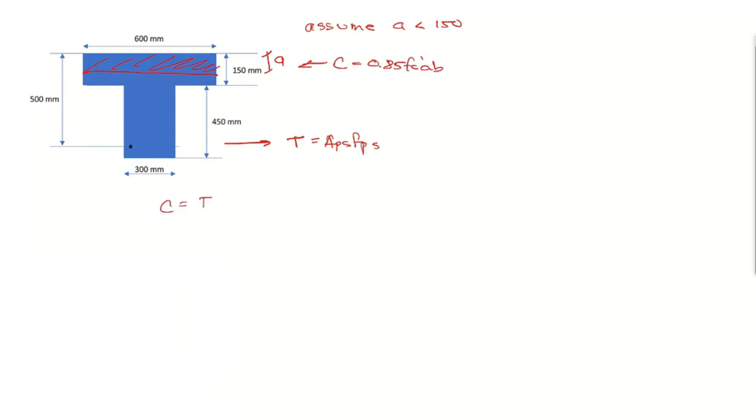And then to solve for A, equate lang natin, compression is equal to tension. Assume muna natin that the compression is actually within the flange. Assume A is less than 150, so within the flange lang siya, no? Ito lang yung A natin. So we have the tension. Tension is equal to APS FPS. Compression is equal to 0.85 FC prime AB. So compression is equal to tension, that's 0.85 FC prime AB is equal to APS FPS.

0.85 FC prime, that is 41.4. AB is 600. APS is 839.9983. FPS is 1686.2893. Ilan po, A? 67.087. So this is less than 150.

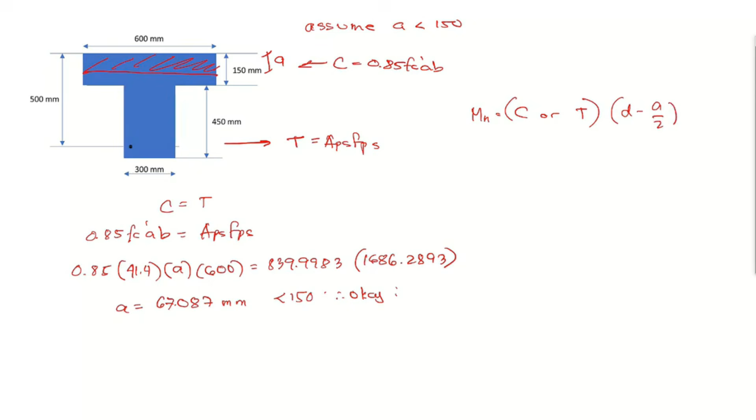Okay, so if that is less than 150, Mn will be equal to compression or tension, D minus A over 2. So Mn will be tension, APS FPS, D minus A over 2.

So that is 839.9983 times FPS, 1686.2893, times D minus A over 2, 500 minus 67.087 over 2. What's Mn? 6670... 660.726 kilonewton meter.

Solve for ES. Para ma-solve yung ES, kailangan ko ng C. So that is A over beta 1, 67.087 over beta 1. Beta 1 is 0.7543. So what is C? Ilan to, C, C value.

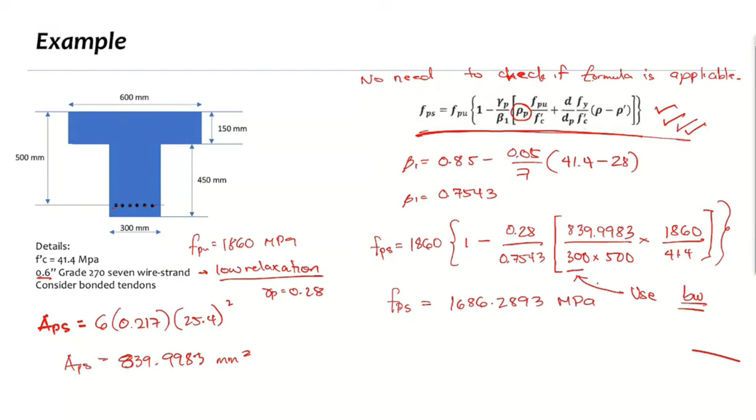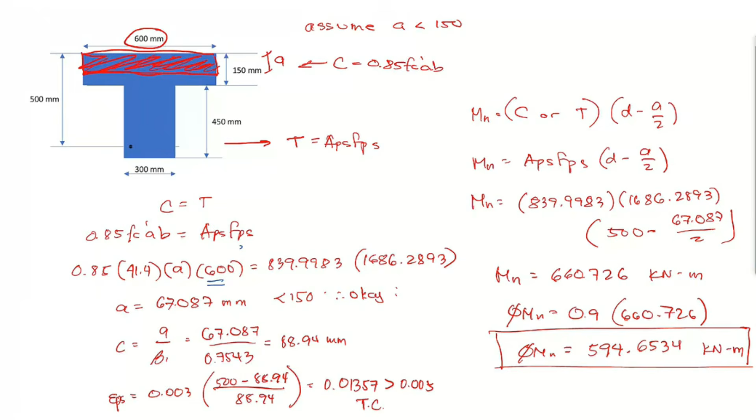Clear po ba to? Are we clear on this? Kung 600 yung sa stress block, 600 yung gagamitin. Huwag mong babawasan, you just follow the principle of mechanics. Lagi pong susunod sa principle ng mechanics. Huwag kang magbabawas, huwag kang magdadagdag. Okay?